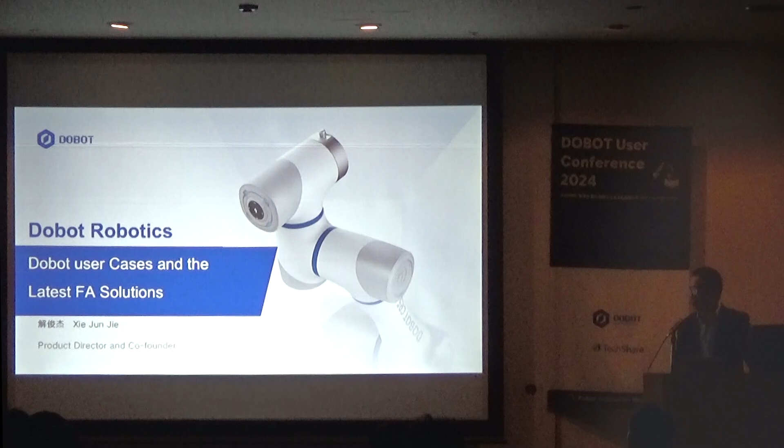Today I'm going to start with two parts. First, I will take 3 minutes to quickly introduce DOBOT, for anyone who just knows DOBOT for the first time, and then I will start with some DOBOT user cases and applications.

So the first part about DOBOT. DOBOT was founded in 2015, and now we are a company with 500 people. We are a relatively young company, but we are growing very fast. For the last 9 years, from the beginning of our company, we have positioned ourselves as a global company, so we design our products with very high standards to meet customers from all over the world.

Now we have our business in more than 80 countries, and to better serve local customers, we have established subsidiaries in different countries. Now we have DOBOT US to serve the North American market, and DOBOT Germany to serve the Europe market. And of course, Japan is one of the most important markets for DOBOT as well.

So we established DOBOT Japan in 2023, last year, and this year we also have a new technical center in Nagoya. The continued investment in the Japan market shows our commitment to our users, and we would like to develop our business for the long term in Japan.

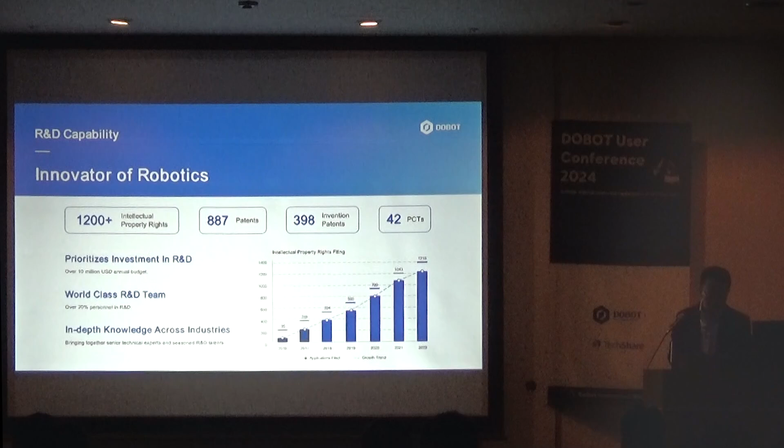So we design our robots from scratch, from the motor, from the controller, and the software, and the robot hardware as well. For the last 9 years, we have...

We have shipped a comprehensive portfolio of cobots, starting from 0.5 kilo to a maximum of 20 kilo. For next year, we are also going to have 25 and 30 kilo payload robots. All the robots are also designed for different industries.

For the small DOBOT Magician, which is widely used in education and research markets, as well as some automation markets. We also have our MG400, M1, and CR series for the manufacturing industry. Our Nova series is designed for the service industry, and because it's very cost effective, sometimes people also use Nova for lightweight manufacturing applications as well.

This year, we also have our latest CR models. We used to have CR from 2019, and in 2024, this year, we just launched our latest model, the CRA series, with better performance, better stability, and a lot more safety features. We also launched end-to-end solutions like palletizing and welding, which I'm going to talk about later.

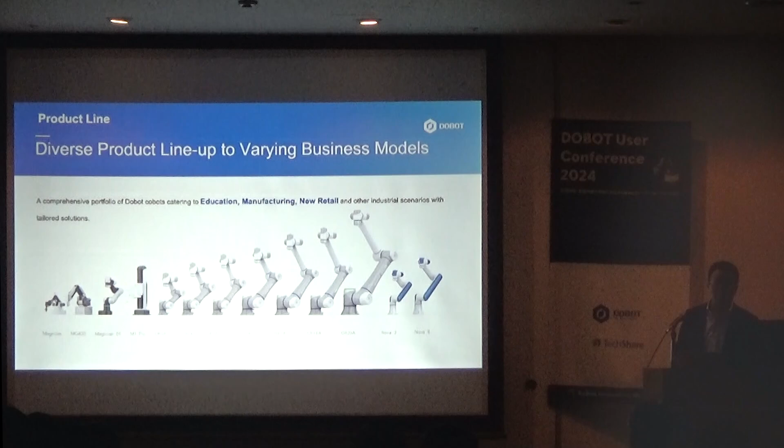In 2021, we also established our own factory to better control the quality of manufacturing. This is one of the largest robot factories in China.

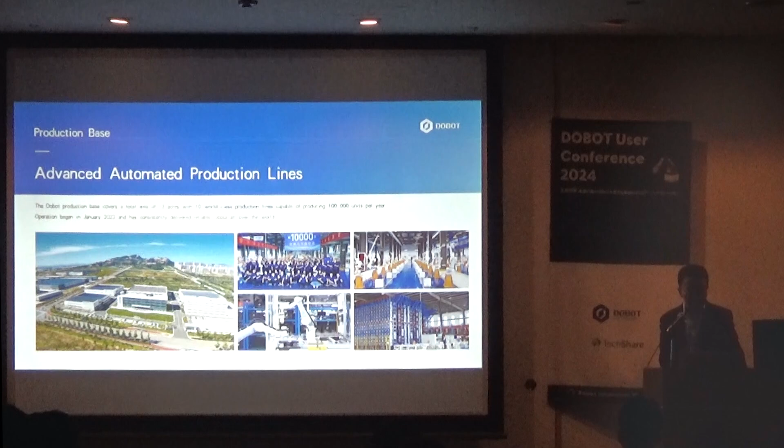Our factory includes 6 buildings. This is one of the main buildings for assembling, and this is the ground floor, which is used for aging tests. Every robot is tested for 72 hours before being shipped out. We also use our own robots to assemble our robots.

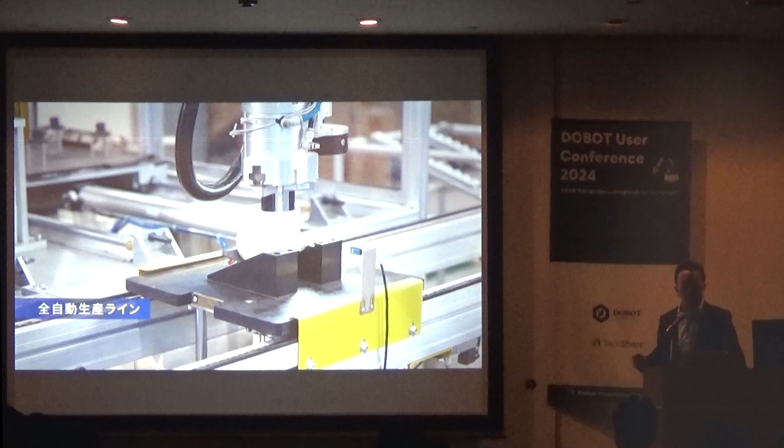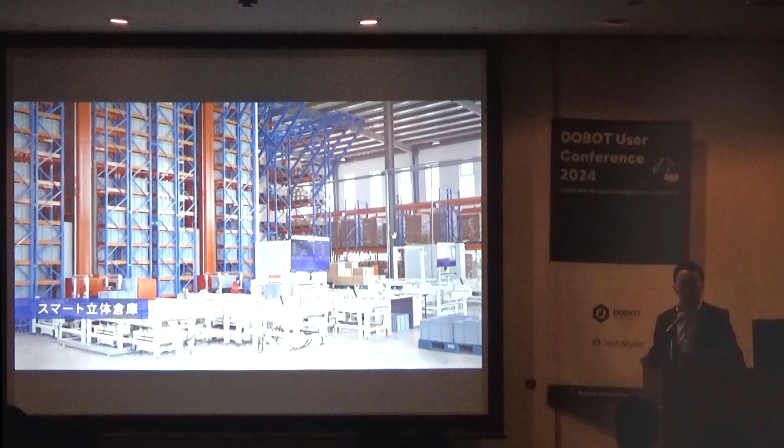We also have this smart warehouse to control the lead time. That's why we can deliver our robots within 2 weeks.

Okay, now the second part covers user cases in different applications. Today I'm going to talk about some typical applications and user cases across the world. The first one is screw fastening, which is a very typical, very common application in assembly lines.

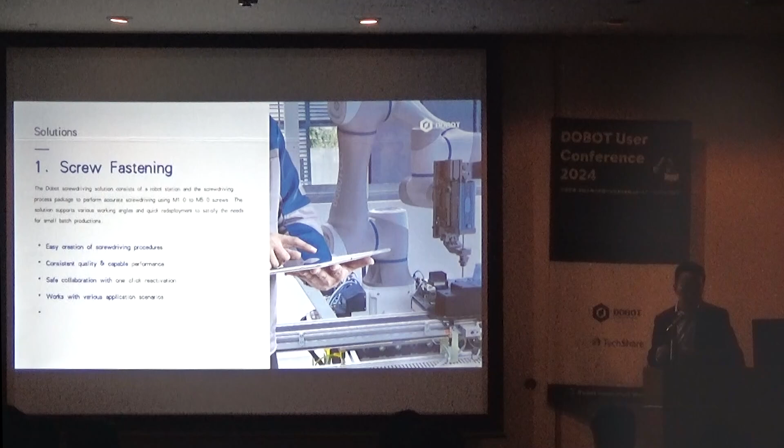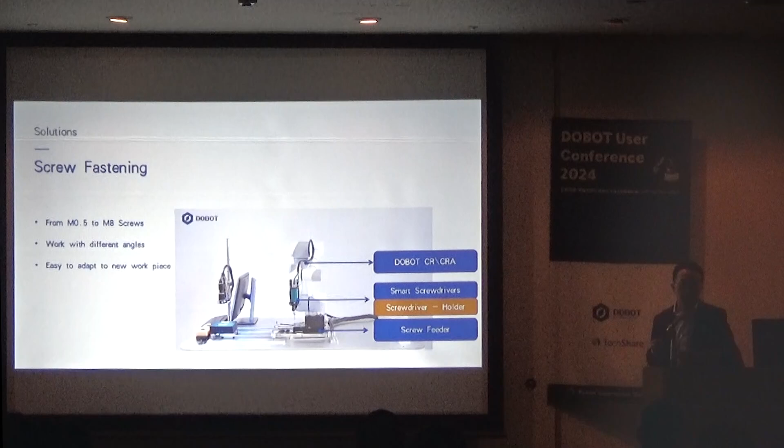Cobots are very easy to use, but screw fastening is sometimes very challenging, especially when we want to reach very high quality. A typical screw fastening setup includes 3 parts: the robot (DOBOT CR or CRA), a smart screwdriver, and a screw feeder. The screwdriver holder, or mounting fixture, is also very critical, especially for good quality.

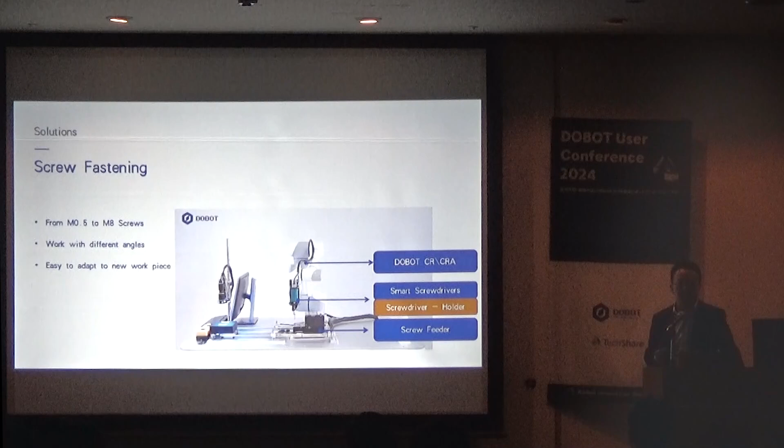A smart screwdriver is generally an electric driver with a controller and communication protocol such as RS-485 or Modbus. The robot can set parameters like screwdriving torque and speed, and get feedback from the screwdriver to determine if it's okay. The mounting fixture includes two parts: an air cylinder to press the screwdriver, and a guide rail to ensure the screw presses down vertically through the whole process, which improves quality.

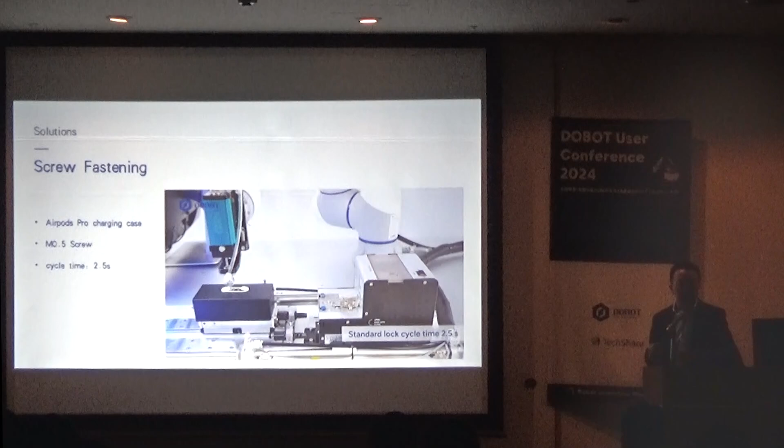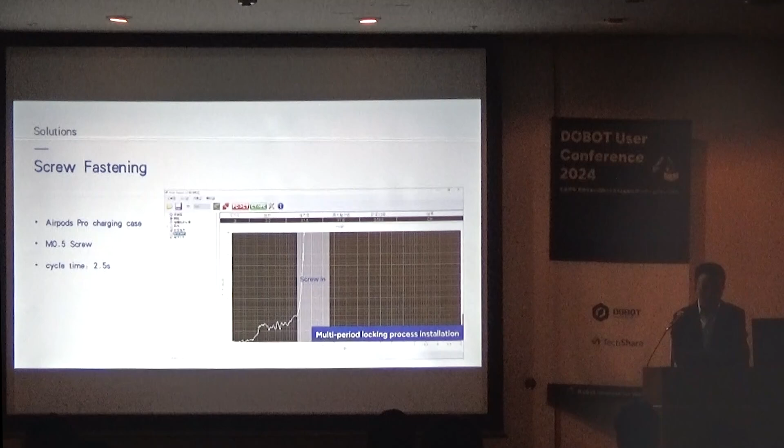Now I'm going to show some videos. The first is a screw fastening application designed for TechShare, for the AirPods Pro charging case. As you can see, the screw is very tiny, only an M0.5 screw. From the video, you can see that with the smart screwdriver, you can set parameters directly from the robot and get feedback. That's important.

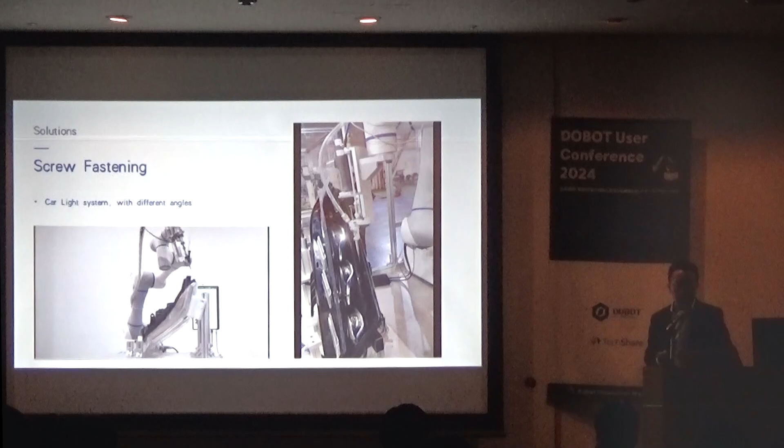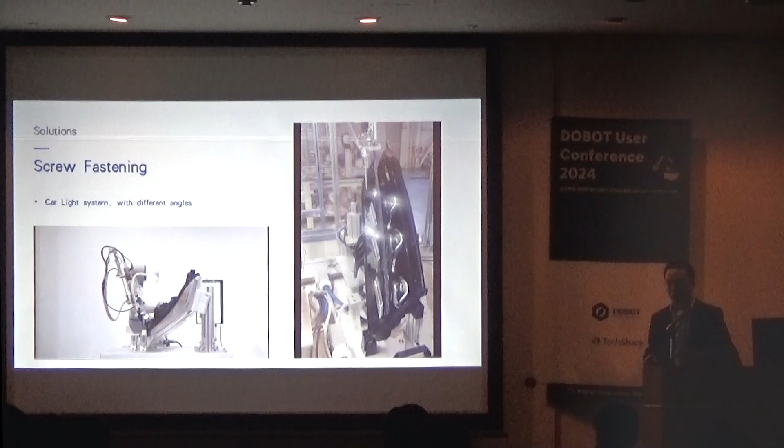The next application is the car headlight. This is a very typical screwdriving application for cobots, especially since headlights are usually designed with curved shapes, so you need to do the screwdriving at different angles. In this video, you can also see the mounting fixture as mentioned, which presses the screw very vertically with very high precision. That's the key for quality.

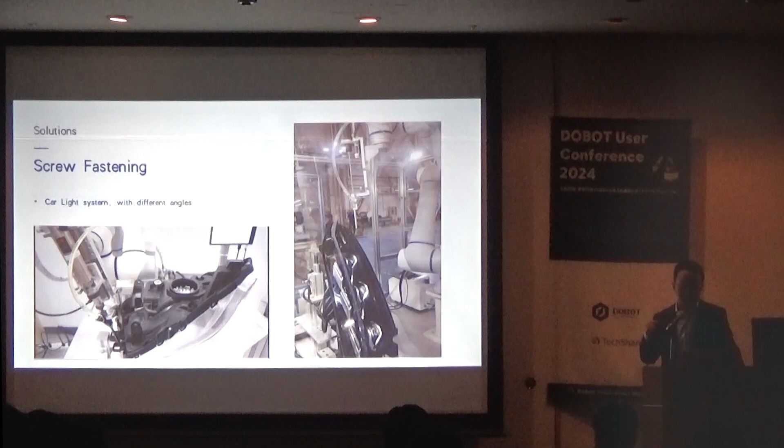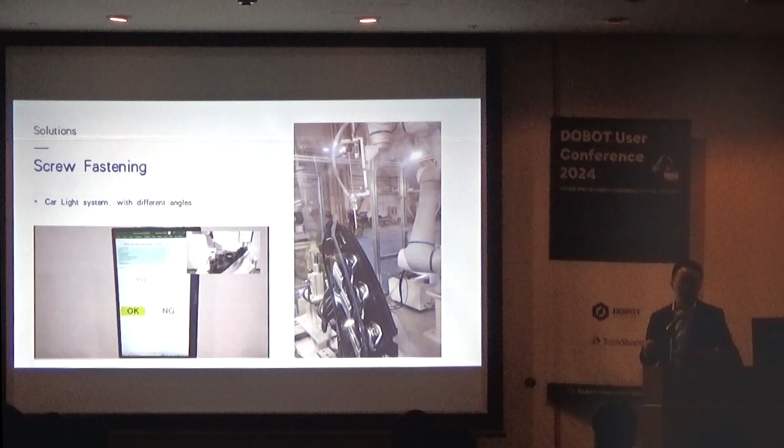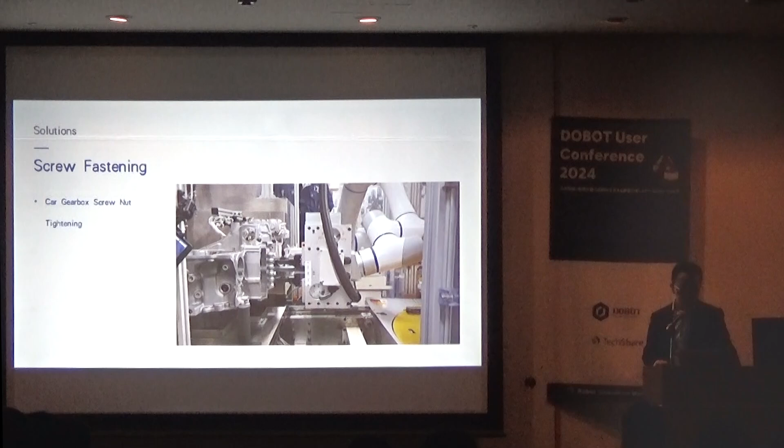You can also see a small air tube, which is used to feed the screw with gas, improving the cycle time. Besides screws, we can also do screw fastening with screw nuts. This is an application for car transmissions. For this kind of application, we generally use the CR16 because it has more torque to meet the requirements.

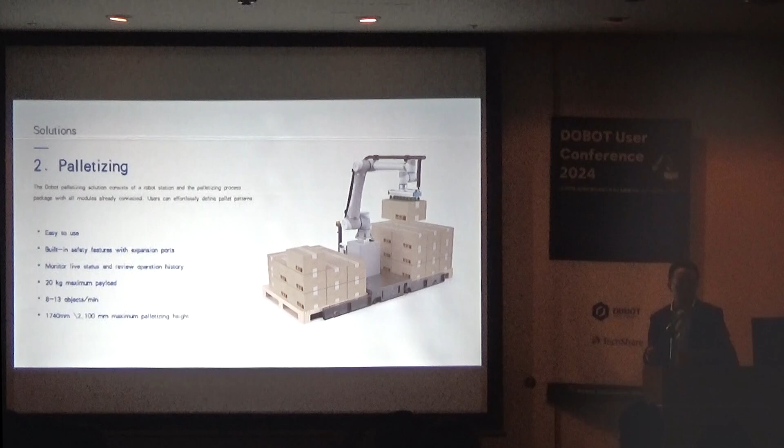The second typical application I'm going to talk about is palletizing. We launched the palletizing solution by the end of 2023, and over the past years we've been continually refining our software and hardware through real applications. The first demo is very easy, but only through real applications can we find the very detailed requirements for different kinds of applications.

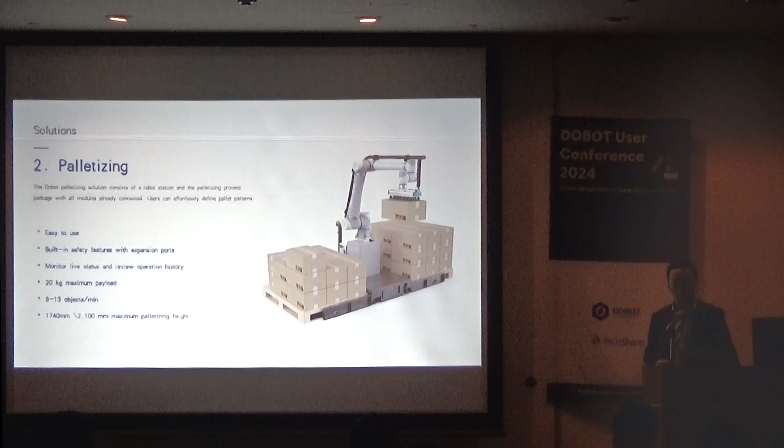Now our palletizing solution is very easy to use. You only need to set parameters such as box size, pallet size, the pattern of the pallet, and basic parameters like speed, then you can start the whole program without needing manual programming. We can palletize up to 20 kilo payload with a cycle time up to 8 boxes, and with a mix of single and double box grabbing strategy, we can improve cycle time to 13 boxes per minute.

We also have two hardware setups: one with a fixed column, the other with a lift column, so you can reach higher pallet heights.

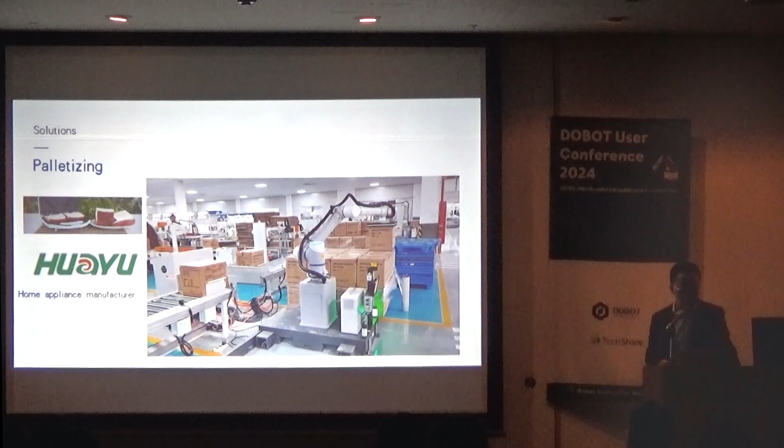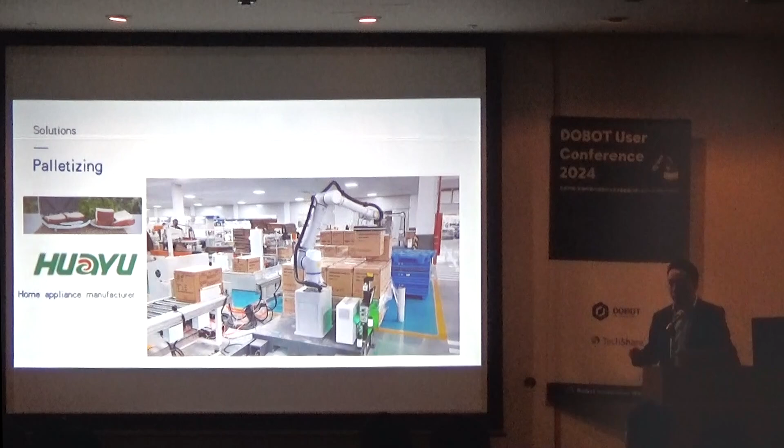The first user case is from a home appliance manufacturer in China. Because of the limits of packaging and production rate, the cycle time for palletizing is not very high. In this case, we can use one single workstation to cover two conveyors, handling two kinds of products at the same time.

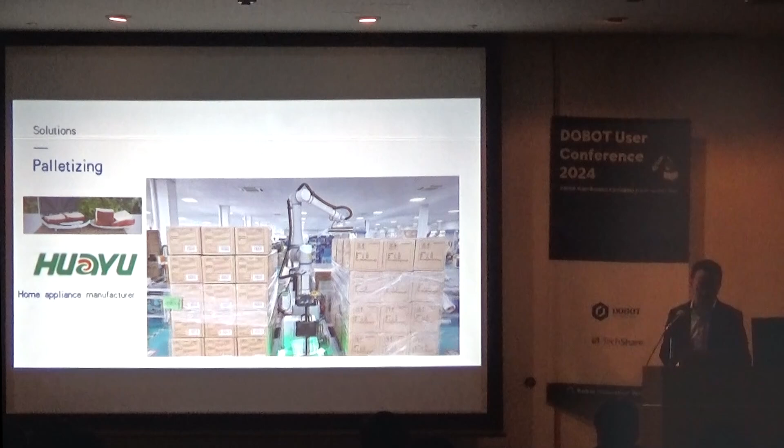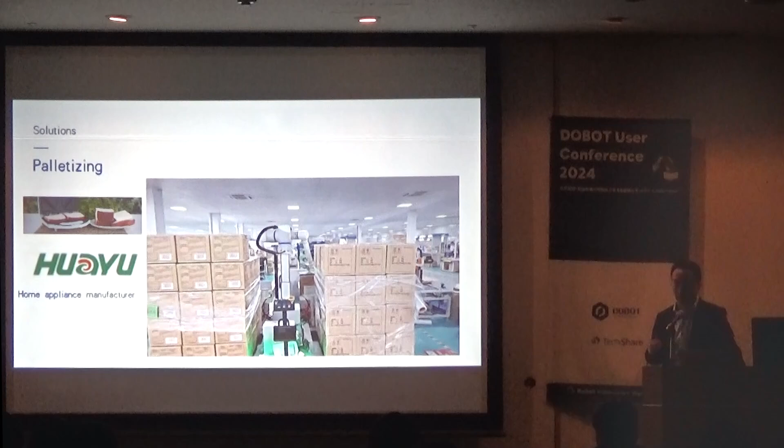Because of the safety features of DOBOT, you don't need to add extra fencing, and that's how you save the space of the factory floor. Also, you don't need to make major changes to the plant.

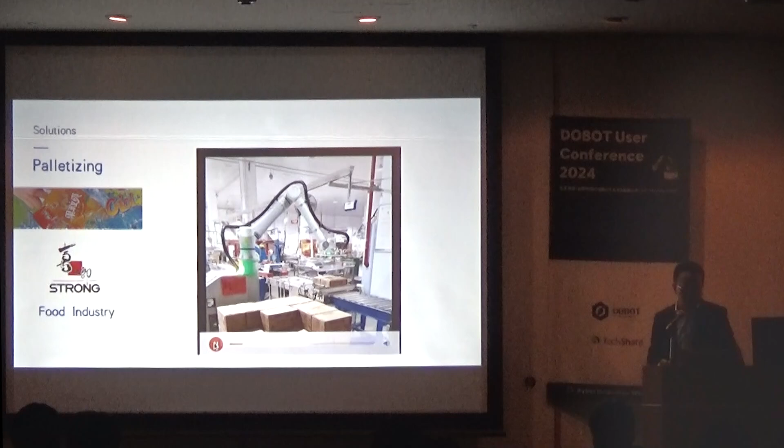The second demo is from the food industry, a snack manufacturer in China. In this factory, we've applied it to 11 lines with 11 robots for palletizing. For snack manufacturers, the cycle time is generally very short, so the production rate is around 8 to 12 boxes per minute.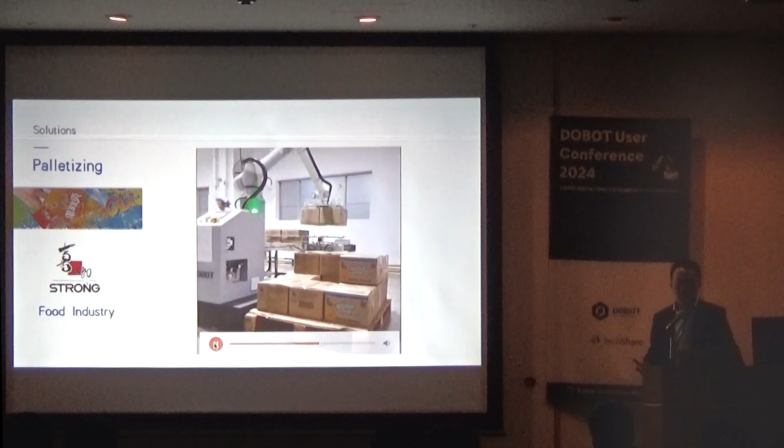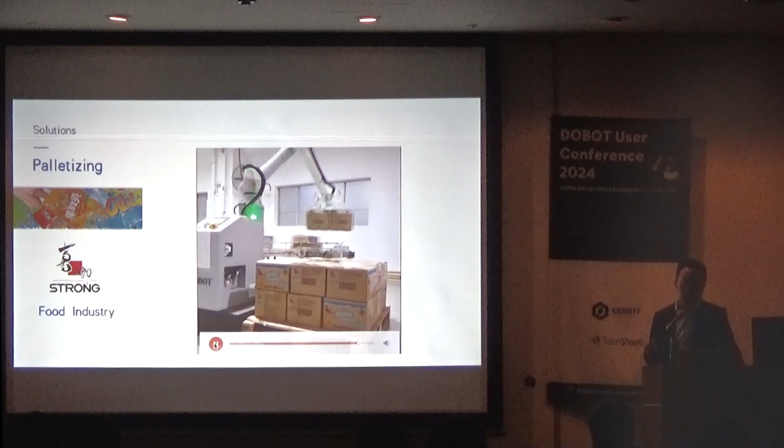But in the food industry, the weight of the box is generally low. So in this case, we can develop a strategy for single box and double box grabbing mixing, taking 2 boxes at the same time in order to improve the cycle time.

The third one I'm going to talk about is machine tending. On the right side of the screen is a workstation designed for CNC machine tending from our partner. But machine tending is more than just CNC - you can also use it for grinding machines, for injection molding, and for testing equipment for inspection as well.

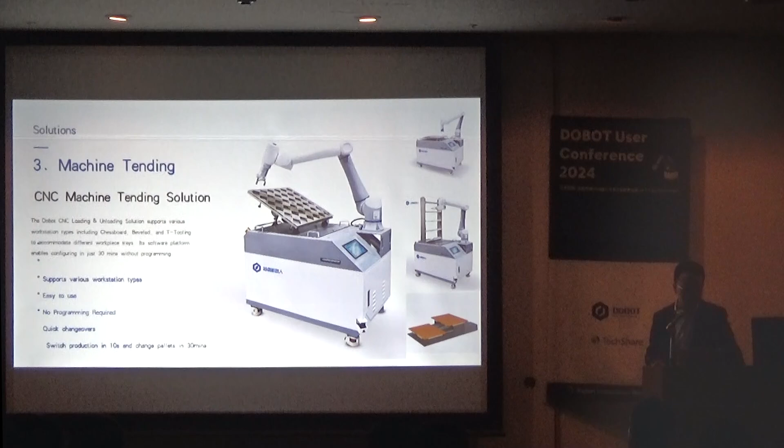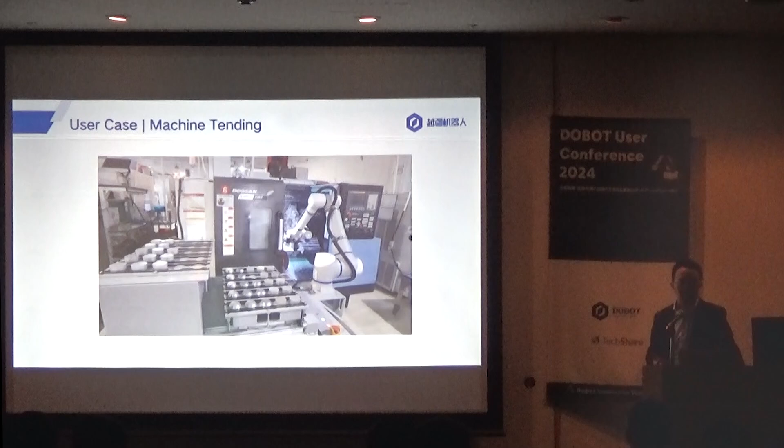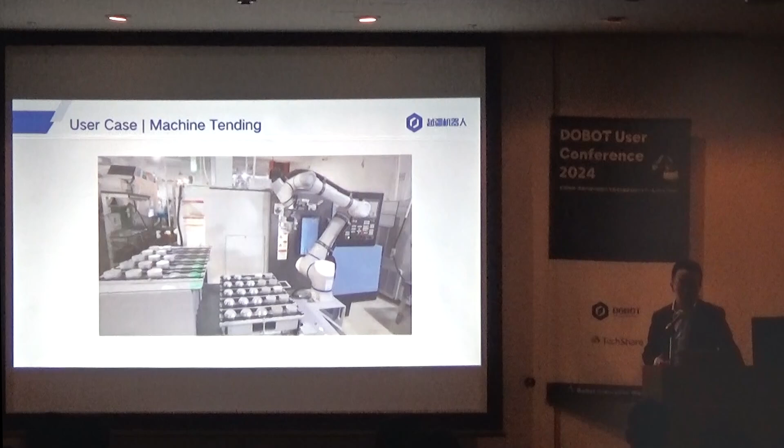The first use case is CNC. In this case, for CNC machining work which takes a lot of time, you don't need one person constantly changing the object for the machining. You can use a robot to do the work, and it can work 24 hours a day, saving manpower.

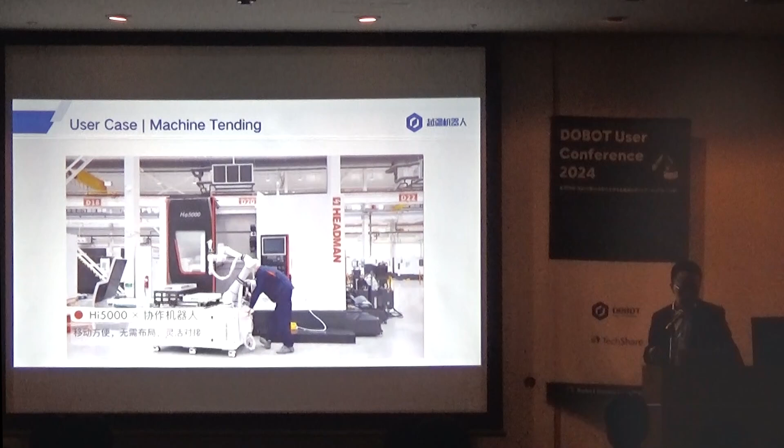This is another use case for machine tending - you can design it as a mobile workstation, so you can move it to a different place and set it up very quickly, relocating the robot and workstation according to production requirements.

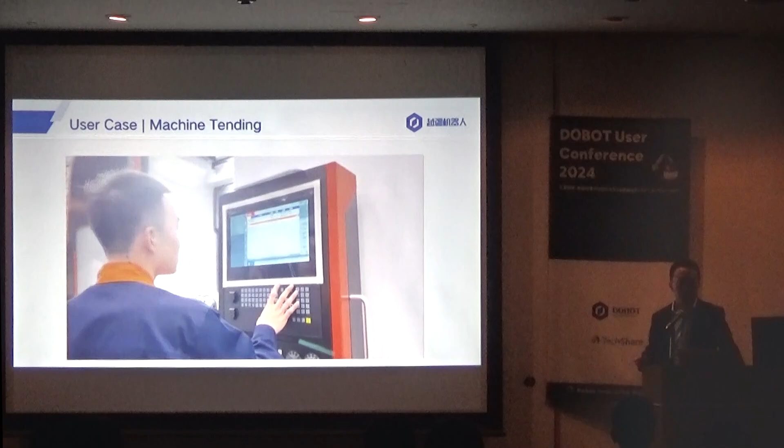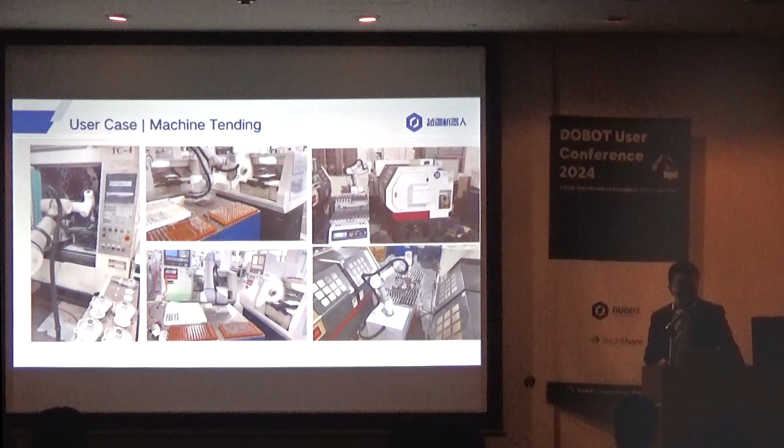We have a lot more use cases. You can also design it to reschedule the machining, using one robot to cover 2 machines.

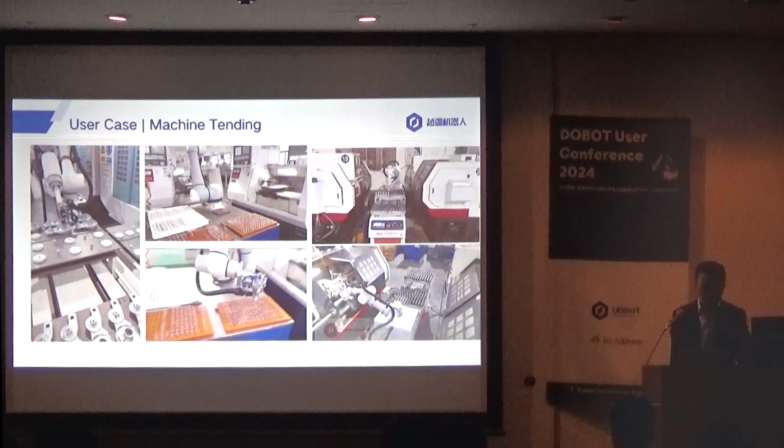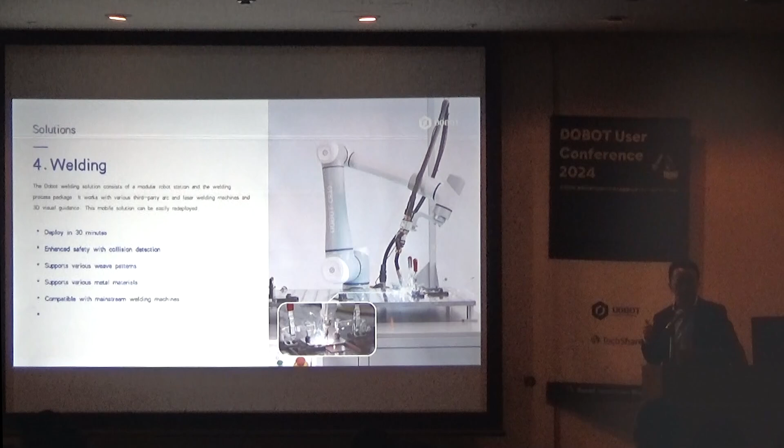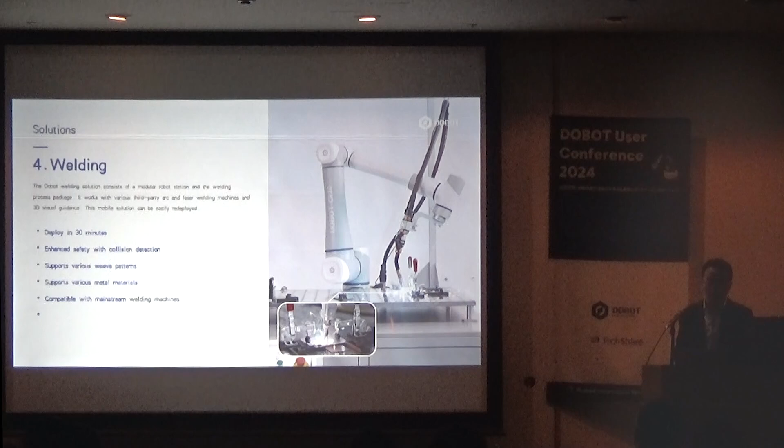The next one I'm going to talk about is welding. Generally we think about big industrial robots for welding in car body production lines, but because of the safety features, ease of use, and lightweight design, there are also opportunities for cobots to do welding, especially when replacing human labor.

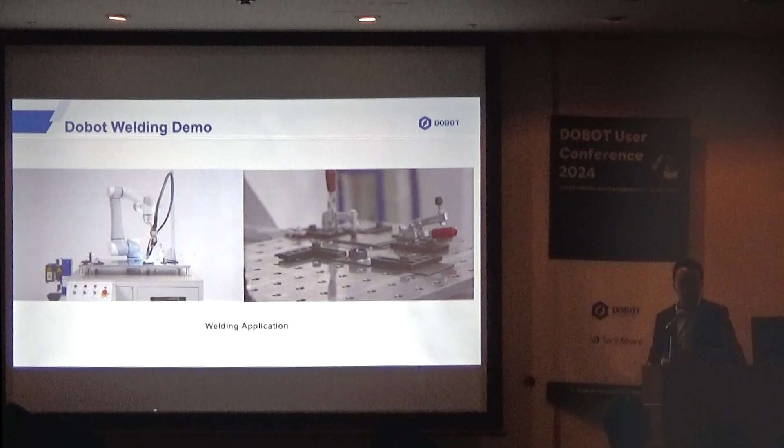This is a demo for welding. In this case, we can design a robot welding workstation, especially good for small batch and high variety production.

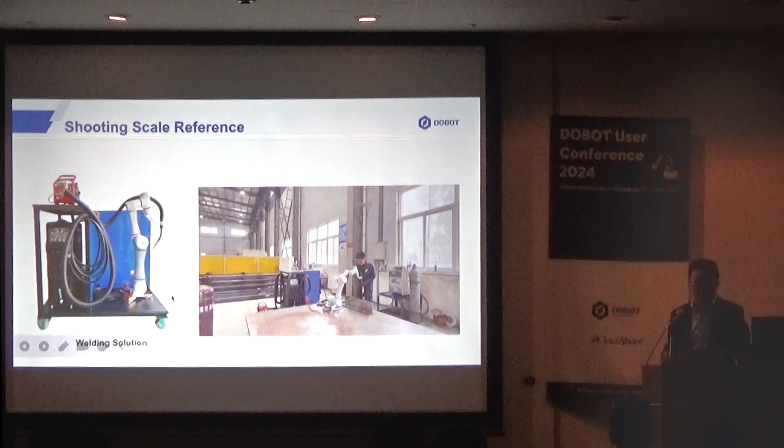We can also design the welding workstation as a mobile workstation, similar to the mobile machine tending workstation. Because of the lightweight features, mobile is a very good scenario for cobots. You can move it to a different place, use a magnetic fixture to fix the robot, and then use drag handhold teaching, guiding the robot by hand to teach the welding path.

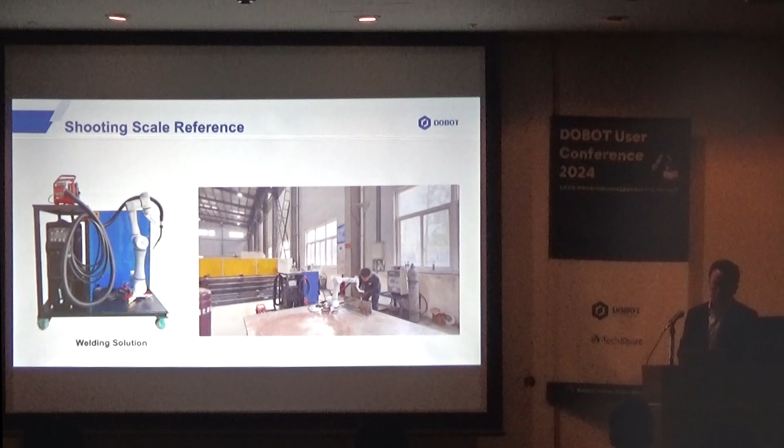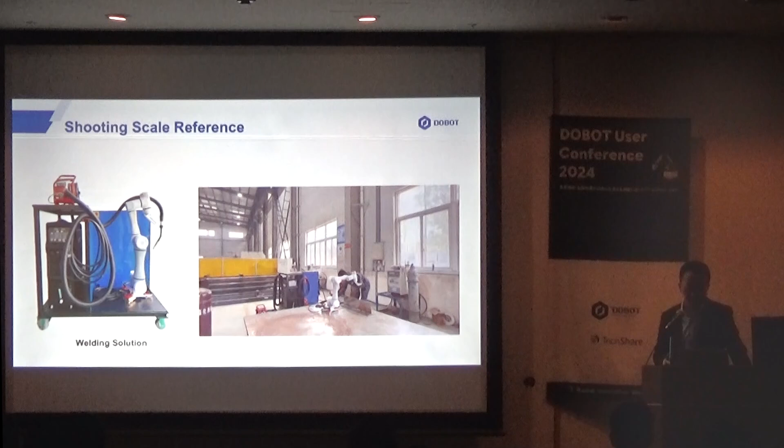The worker uses his hand to guide the robot. For some steel structures with just basic lines, it's very easy to teach. But welding takes a lot of time, especially with thick steel where you need to do multiple passes - welding again and again. So it takes a lot of time, but with a robot you can make the whole procedure much easier.

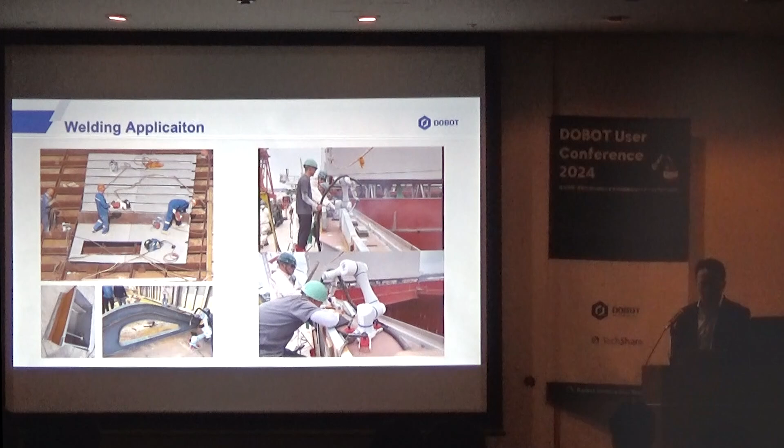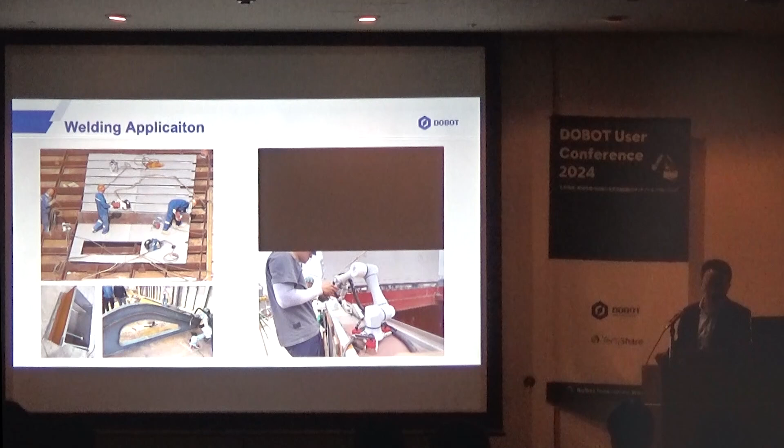Because our cobot is lightweight, especially the CR3 or CR5, it's only 16.5 kilos and 25 kilos. So it's also very good for outdoor applications, especially for steel structure and shipbuilding factories.

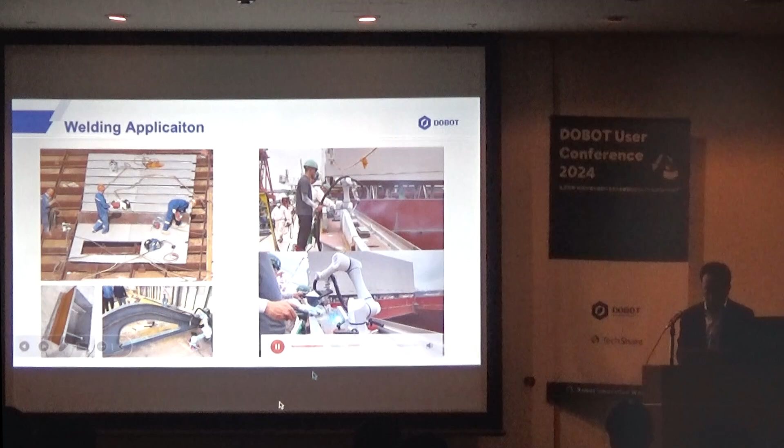In this video, you can see the magnetic fixture, so the robot can be put into a different place and start to work.

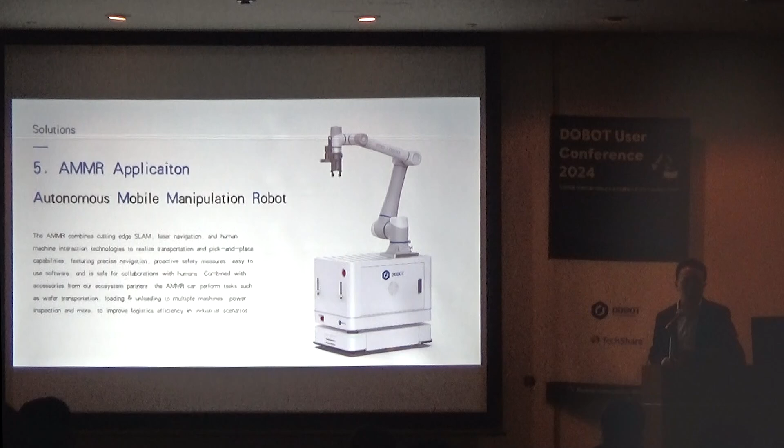And the next one is AMMR application. AMMR means autonomous mobile manipulation robot. As we mentioned, the lightweight of the cobot is also very good for the mobile case. And with mobile case, with AMR and with robot, you have the mobility and manipulation capabilities at the same time.

Besides the semiconductor packaging application, you can also use AMMR for CNC machine tending. Especially for large objects, the machining time also takes a lot more, so in that case you can use one robot and AMR to cover a lot of machines.

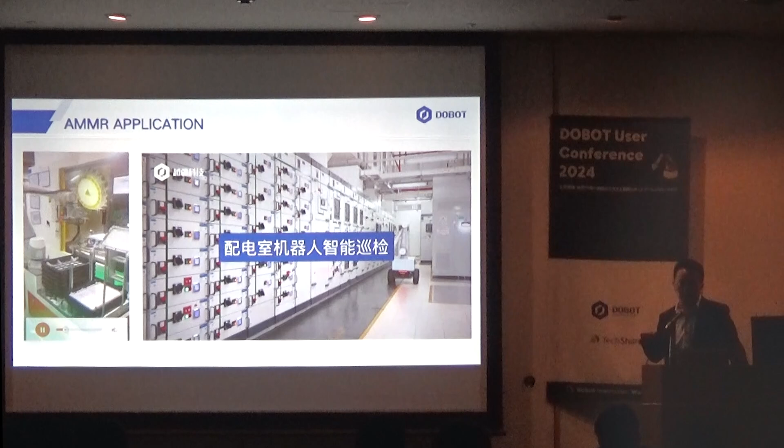We also have VX 500. In today's later topic you will know more about our camera. That camera has 2.5D location capabilities, which is especially useful for AMR applications. When you have AMR, it always moves with a certain kind of error or offset, not very big, but maybe 10 millimeters. With the camera, you can relocate using a landmark to find the target position.

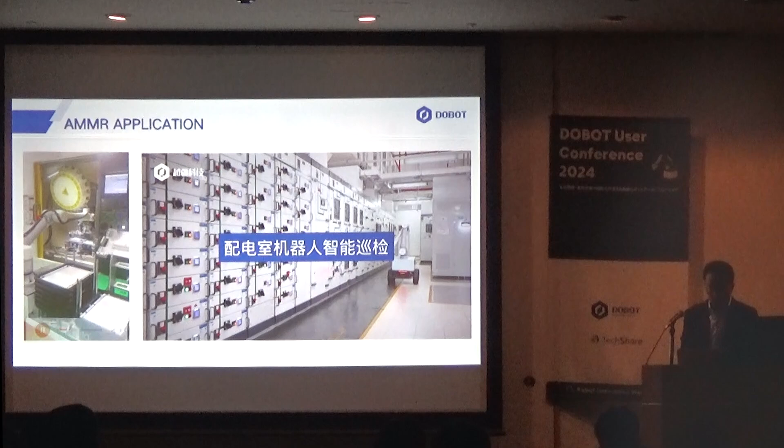Sometimes we also use AMMR for inspection applications. This is a demo for a power plant that uses AMMR to do inspection for different valves, and sometimes uses the robot to do some manipulation work as well.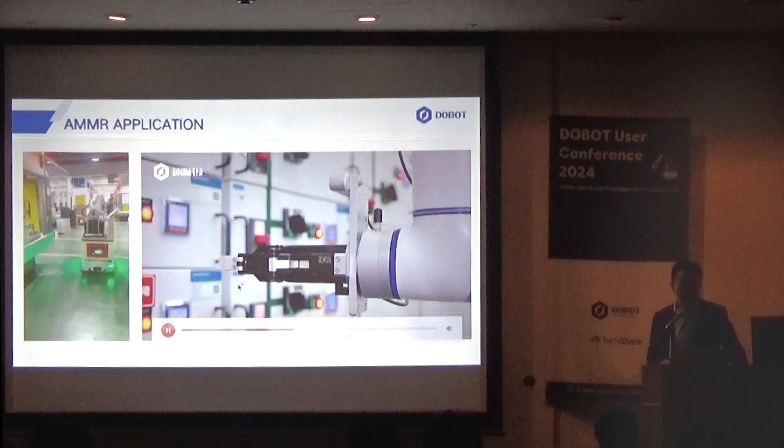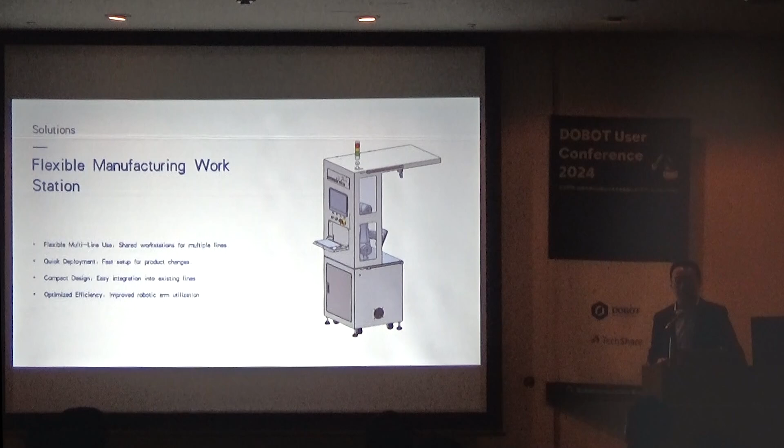The last one I'm going to talk about today is a flexible manufacturing workstation. This is a new concept we are currently working on with some customers. The idea is to use modular design to adapt into different applications, like human work. I think today's challenge is flexibility. When we want to use a robot to cover some applications, sometimes integration takes a lot of time, and in this case we want to use modular design to solve this problem.

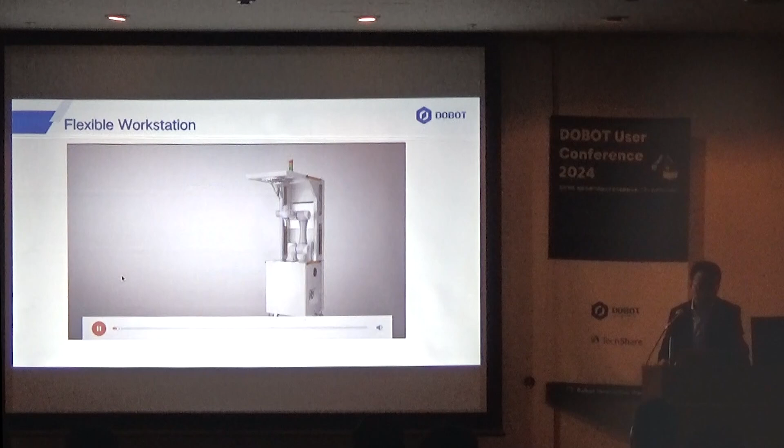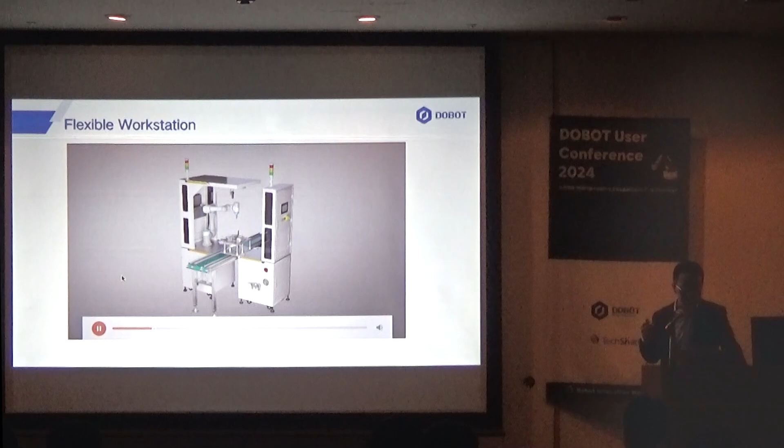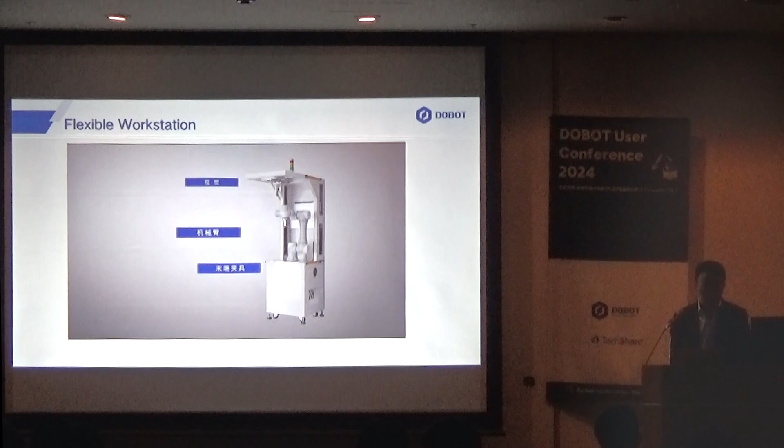This is a concept video. We also designed the whole system, and we have some customers testing this, but we can only show the demo video here. Let's start from the beginning. The whole workstation consists of several parts: the robot and the vision system, the end effector, a mobile workstation, and light curtains.

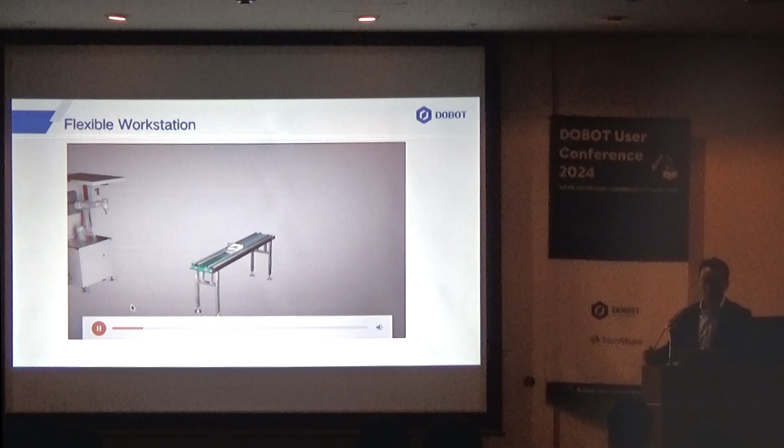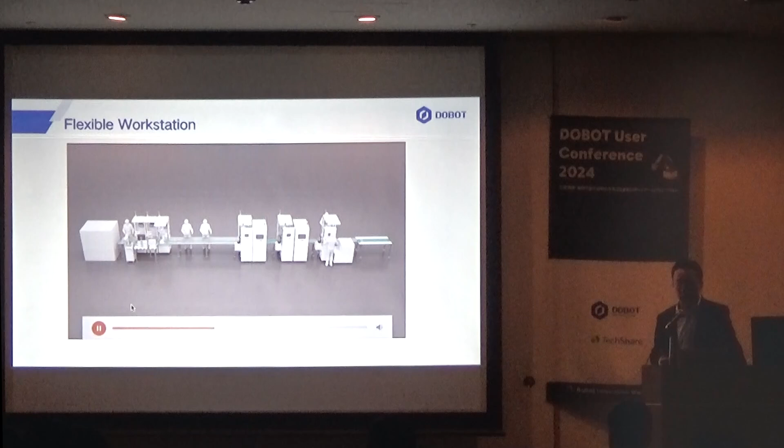So in that case, you can move the robot. The whole workstation is designed in a very compact way, so it can move into the existing production line without changing the plant arrangement. Because of the safety features of our cobot, especially when you have the safety skin, you can set up a safety wall and the location for the robot, and it stops when some people touch the robot.

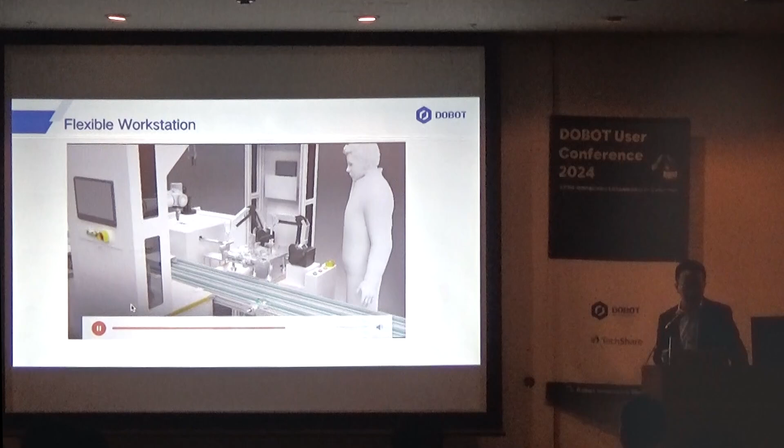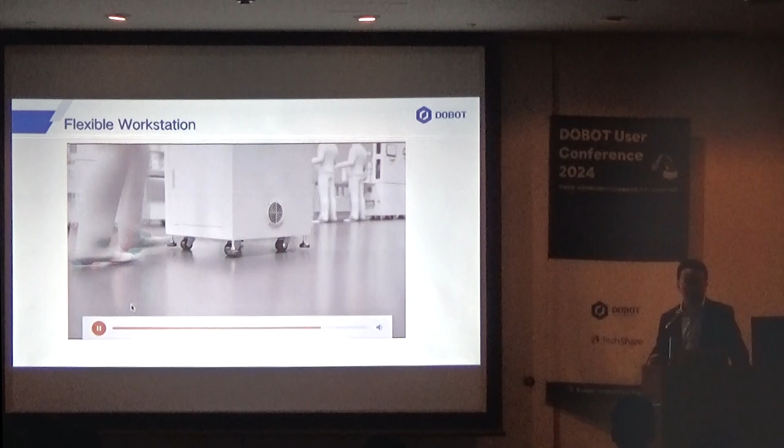For some high precision assembling tasks, you can also use other automation to do that part. The robot just does the loading, unloading, screw driving, or dispensing—this kind of typical application. But if you want very high precision assembling, you can use other automation to do the whole work. You can use CR, or you can also use MG400.

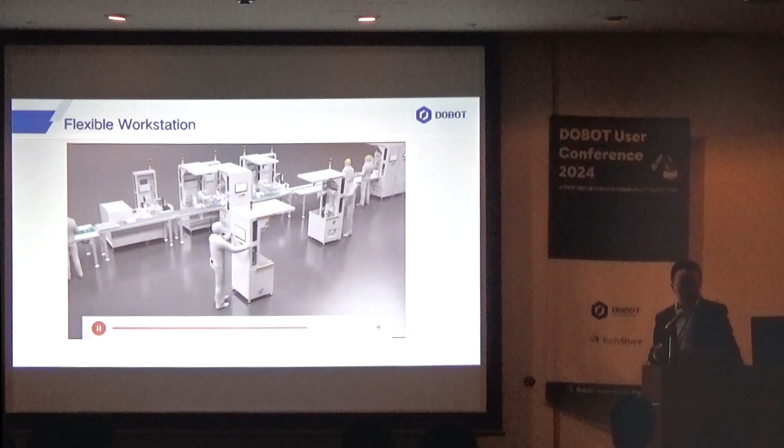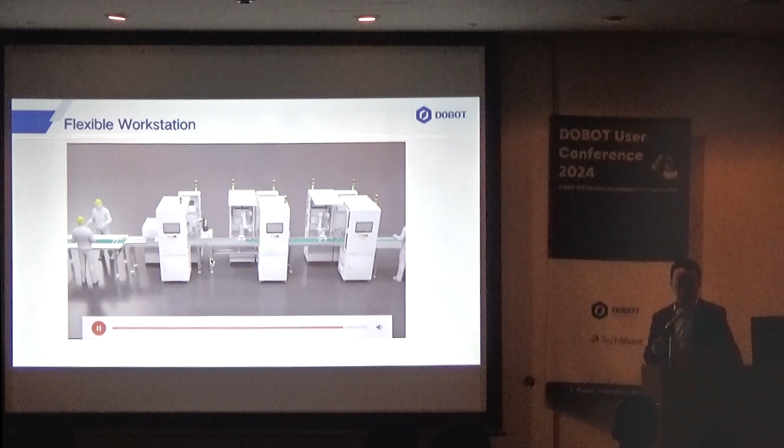With this modular design, when the production changes, you can reschedule the application of the robot. You can change the end tools, you can relocate the robot, so it's very flexible.

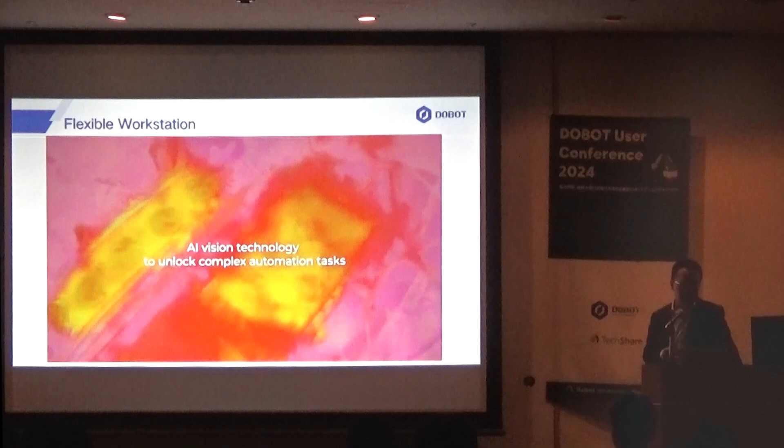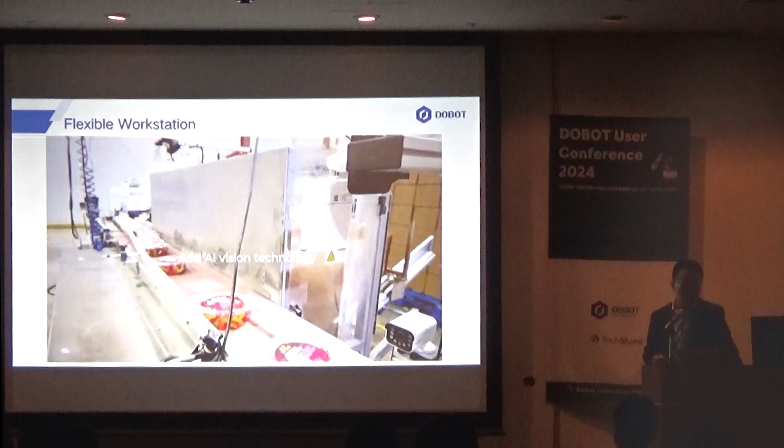This is another user case from the US, but the concept is very similar. You make a modular mobile design workstation with a robot, to make it reusable and adaptable to different tasks. In this use case, they also take the latest vision and AI technology, which makes adaptation much easier—less programming and more efficiency when changing to a new production.

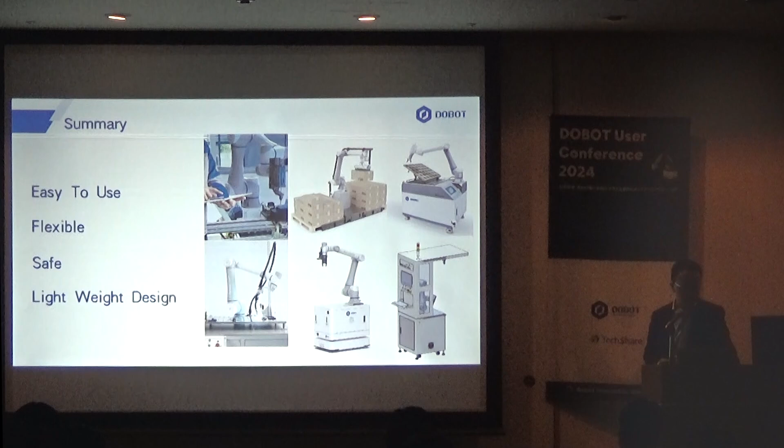Okay, that's all the use cases I'm going to share today. There are a lot more you can find out on our website or our YouTube channel. Basically, all the applications just show the robot is easy to use and flexible, especially when changing production requirements, and also the robot is safe to work side by side with people, and the lightweight design gives it more mobile capabilities.